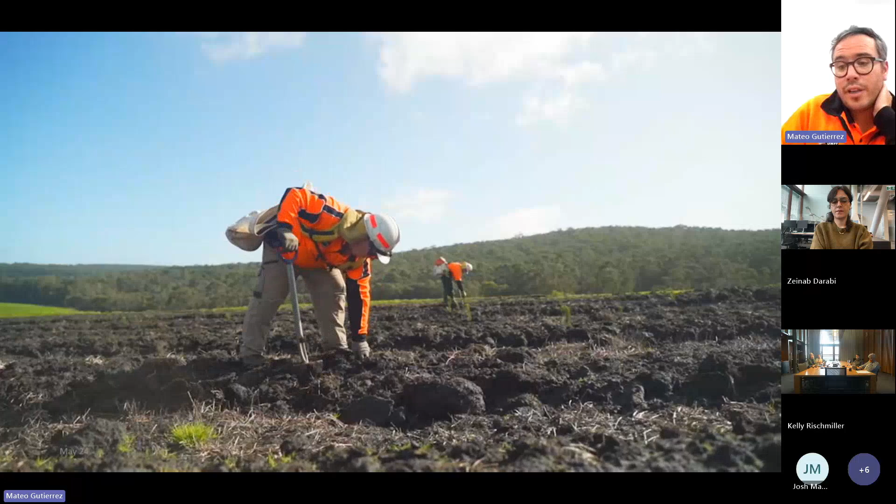So first of all, as you guys already said, I work for AKD Softwoods. It's an Australian-owned business. It's a vertically integrated business, so we own softwood plantations across Australia in different locations. We have different sawmills located across the East Coast. In those sawmills, we produce different timber products, from wood chips, which we export, up to structural timber products, but we also produce green case and other materials that can be used in packaging. But obviously, our main concern is structural materials.

Obviously, I'm a structural engineer. My role in the business is working with our clients, our customers and end users of our products to see how we can better utilize the fiber. We know Australia is a resource constrained country. We know that we have had timber shortages before, so we just want to make sure that we are using that timber correctly.

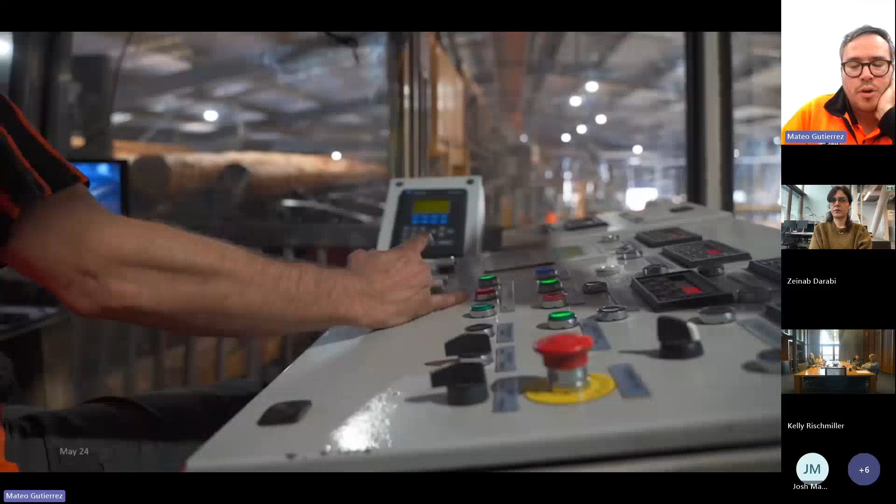So part of my presentation today will be explaining the way that we process our timber and how we use it, what are the implications of the material properties and the material characteristics in the overall performance of those products, and then suggesting some of the future pathways that we need to take in order to improve the use of the material and improve the performance of the material.

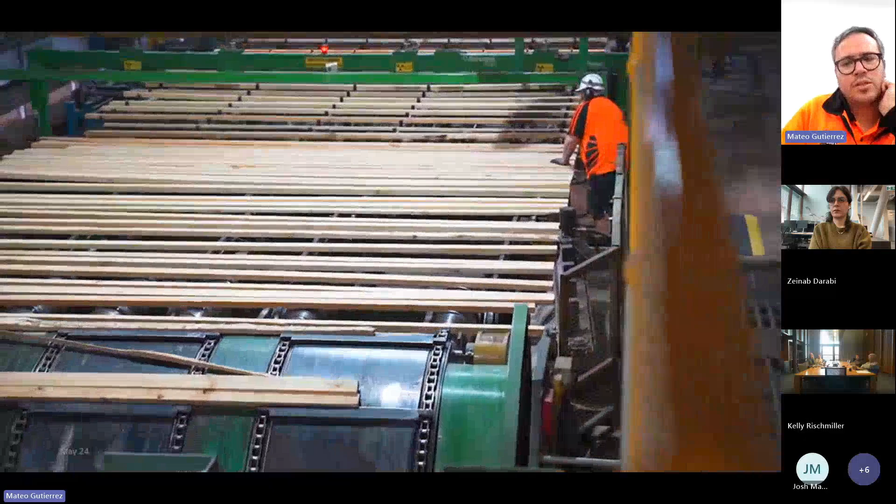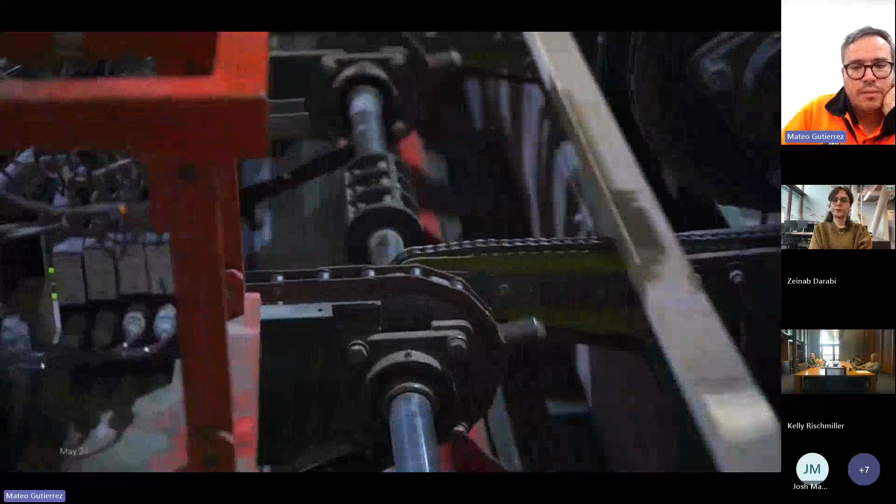So as you can see in these videos, AKD receives the logs at the different sawmills. The sawmill where I am today is in Colac, Victoria, around 2 hours away from Melbourne. But AKD also has other sawmills in Caboolture, Queensland, located about an hour and a half away from Brisbane, where we also produce structural timber, and Tumut in New South Wales, around 4 hours away from Sydney, and we also produce timber there.

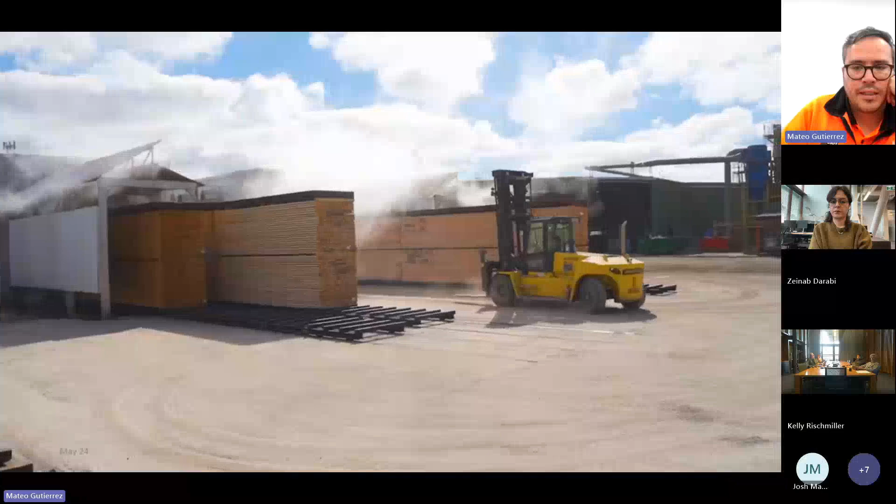But we have other locations like Yarram and Port Pirie, and also Oberon in New South Wales. So after timber is cut and graded at the green mill, timber is kiln dried and then goes to the dry mill where it's graded and then finally packaged and sent to our customers. But I will go through that later. Which is what you are currently seeing in that video.

So again, the content of my presentation will be some timber fundamentals, understanding the characteristics of timber and what will be the impacts of those characteristics in the end products. What are the main structural systems where we use timber, especially light timber framing, which is where all our products are being used. But I'll also give you a brief intro on engineered wood products, systems with engineered wood products,

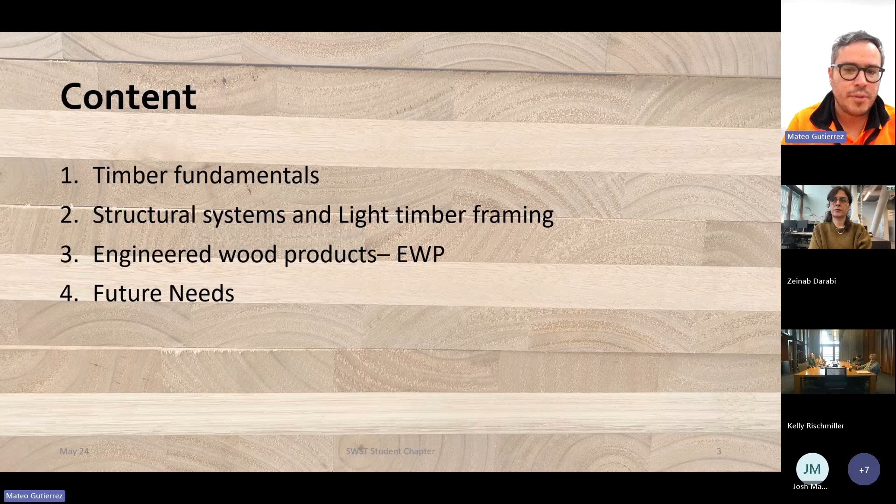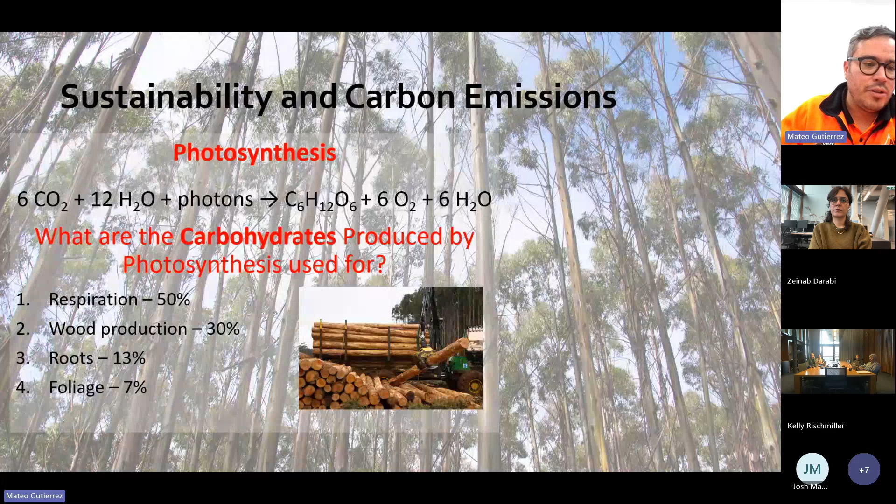and some future needs. So in terms of timber fundamentals, I gave the presentation the title of the ideal material to achieve net zero targets. It's because we know that timber sequesters carbon. A lot of that carbon is used in the production of wood, of course, and we know that around 50% of the dry weight of wood is equivalent to the carbon removed from the atmosphere. And to produce structural sawn timber, we use relatively very low energy,

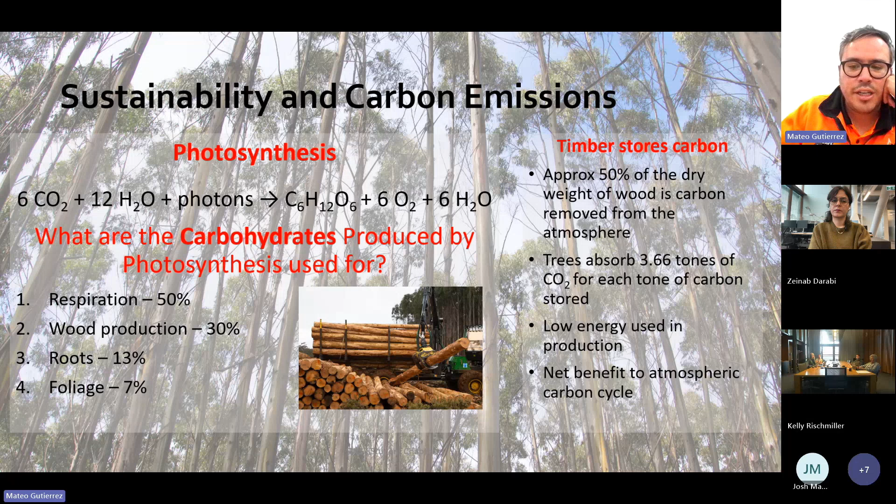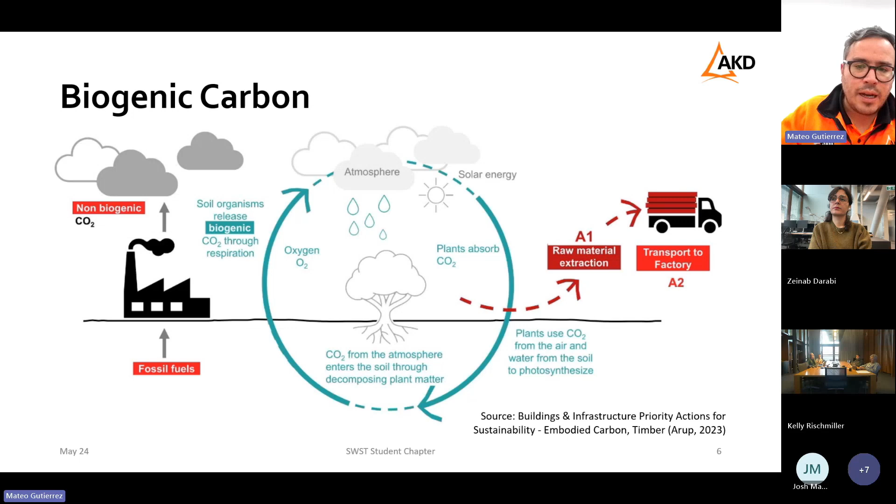and it is also important to understand what biogenic carbon is, because this is very common terminology that we use these days. And again, I'm not an expert on this. I'm a structural engineer, but I'm aware that this will have a massive impact in the future, especially with those zero carbon targets. Biogenic carbon is all the carbon that is produced and stored by the trees. So this is what makes timber carbon negative.

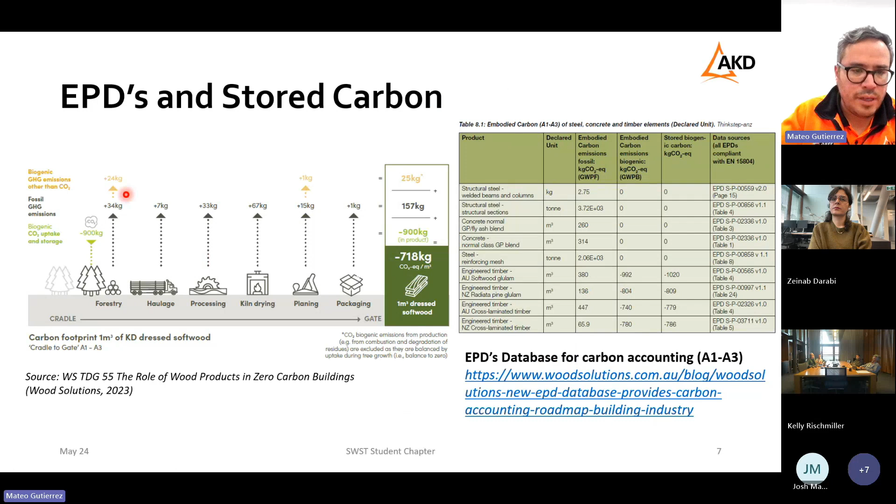So let me just turn on my pointer. So you have carbon emissions produced during the manufacturing or production of structural timber, but because timber sequesters carbon during the growth of the trees, the end number is a negative number.

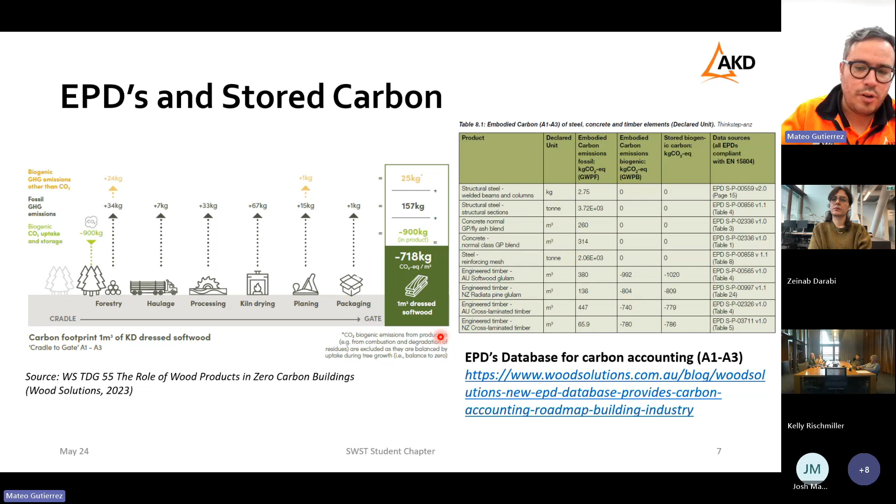So Wood Solutions actually just published a very complete data set or database with different timber products and the carbon emissions and EPDs from all those different products. So I would recommend you, if you're interested in this topic, to take a look at the Wood Solutions website.

So for those that are not familiar with the sawmilling process, or the process to produce structural sawn timber, as I was explaining before, we get the logs at the sawmill, we sort those logs into different groups based on the diameter and the properties of the logs, and then we run the logs through the green mill, where we cut them into green boards, and then those boards are stacked and sent to the kilns where they are dried,

and then after the material has been dried to a moisture content of around 12%, the material is run through the dry mill, where we trim those boards, grade those boards, and obviously dress them as well to the final dimensions. So this is a very important process, the grading process, and I'm going to expand a little bit more on that.

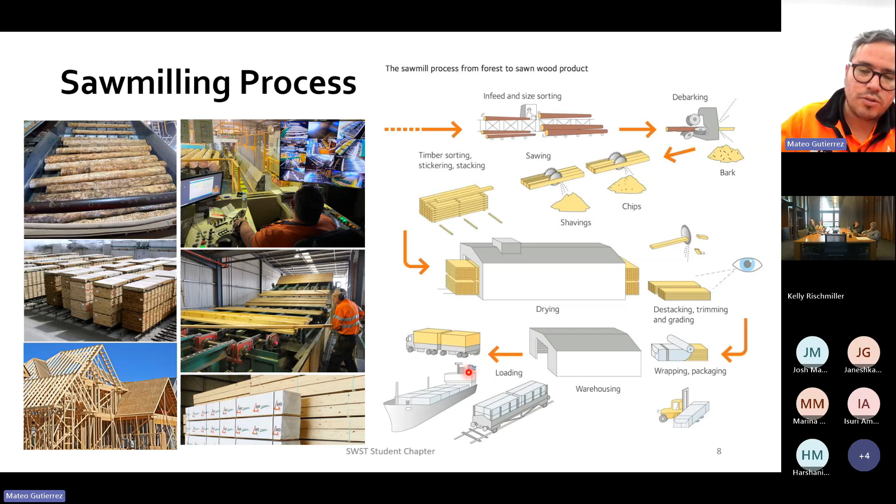And then finally, the material is packed, wrapped, and sent to the end users, which could be stick builders or frame and truss manufacturers, or even other factories that can produce engineered wood products based on those boards. So it is important that we understand some of the basic concepts about the anatomy of a log, because when we cut timber, those properties are going to affect the performance of the material.

So we know that obviously there is softwood and hardwood, and that we have fibers that are oriented longitudinally along the log height. And when we cut that material, which has a circular shape, we're going to end up with some rectangles, and those rectangles are going to be affected by the growth rings of the log.

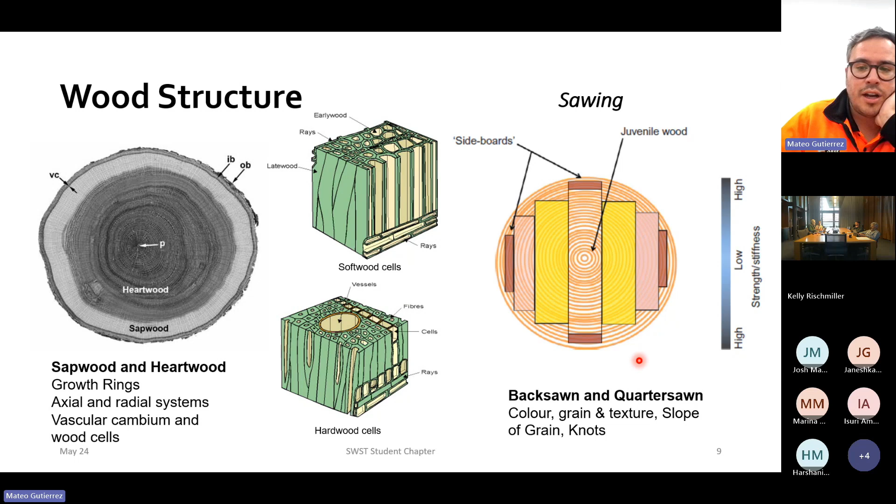We know that the center of the log, usually where the juvenile wood or the pith is located, has low stiffness, and the outer part of the log, where the sapwood is, has higher stiffness, higher density, and therefore better mechanical properties. So this has an impact not only on the stiffness and the mechanical properties, but also on the preservation of the material and the effectiveness of those preservative treatments as well.

Kiln drying is another very important process, because timber is highly dependent on the moisture content. We know that timber suffers dimensional changes below the fiber saturation point. So we want to make sure that the timber moisture content is below the fiber saturation point, because we want to reduce those dimensional changes, but also because the mechanical properties change with moisture. So the lower the moisture, the higher the strength and the stiffness in the material.

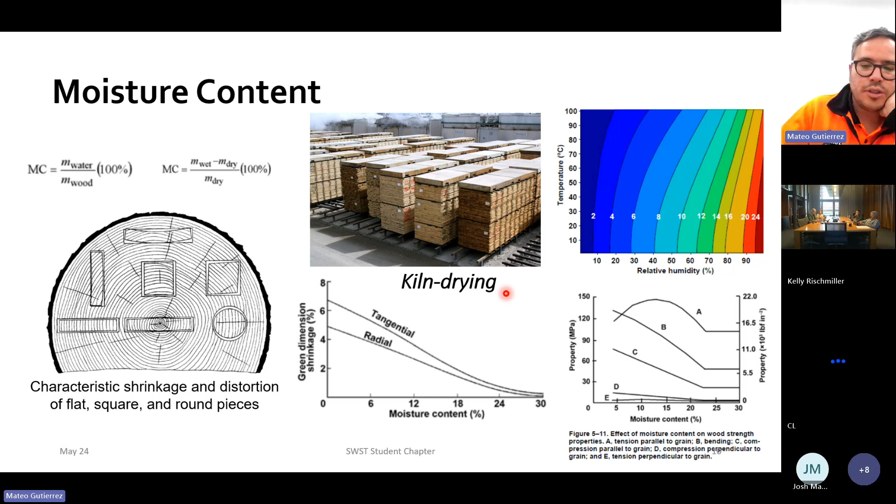And obviously that moisture content will depend on the environmental conditions where the timber is being stored and being used. So we use tables like this one to calculate the equilibrium moisture content of the wood, and what will be the impacts of that moisture content in the properties.

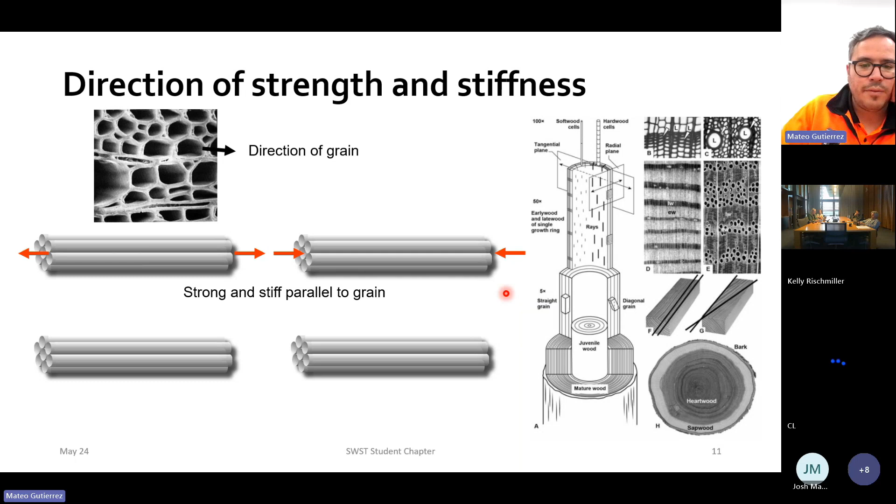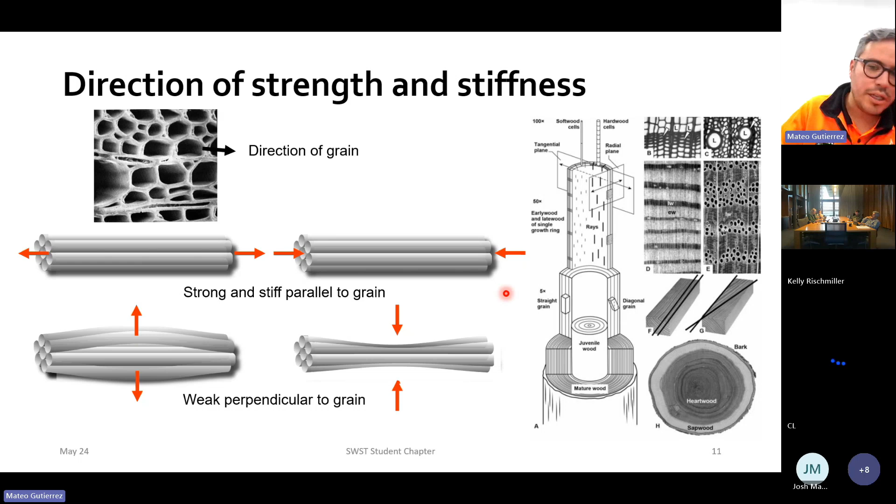Another thing that is very important is the direction of the fibers. As I mentioned before, the fibers are mainly responsible for the strength of the material. We know timber is very strong when we apply loads parallel to the fibers, and it's quite weak when we apply loads perpendicular to the fibers. So understanding the orientation of those fibers and the impact different features like knots or holes will have on those mechanical properties is quite important for us.

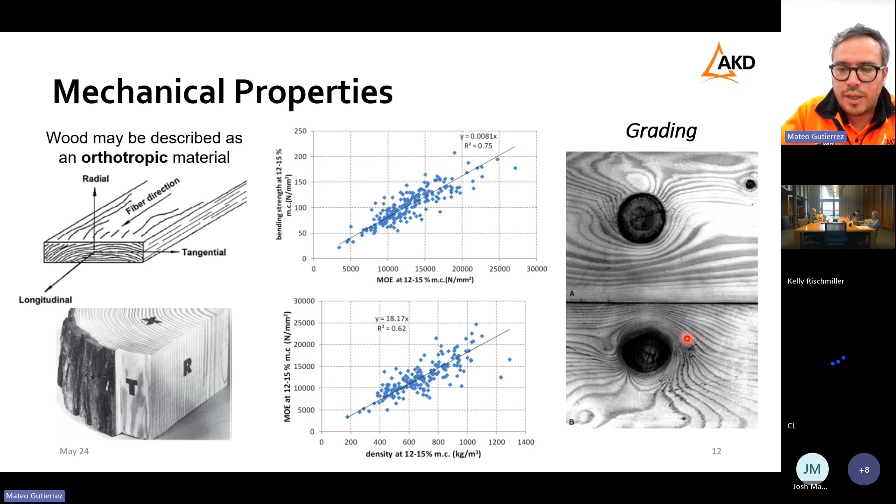And that's why we have the grading process, because through the grading process, we use some primary properties like the stiffness or the density to predict the strength of the timber. So knots that may affect the orientation of the fibers, or that may reduce the cross section of the timber pieces, will have an impact on the strength of the material.

And that's why we have strength grading or stress grades, which is pretty much having different groups of timber that have similar characteristics. There are different ways of doing stress grading. The most common ones are visual grading and machine grading. At AKD, we only do machine grading. So we use cutting edge technology to determine the properties of the boards and to predict the stiffness and the strength of those boards.

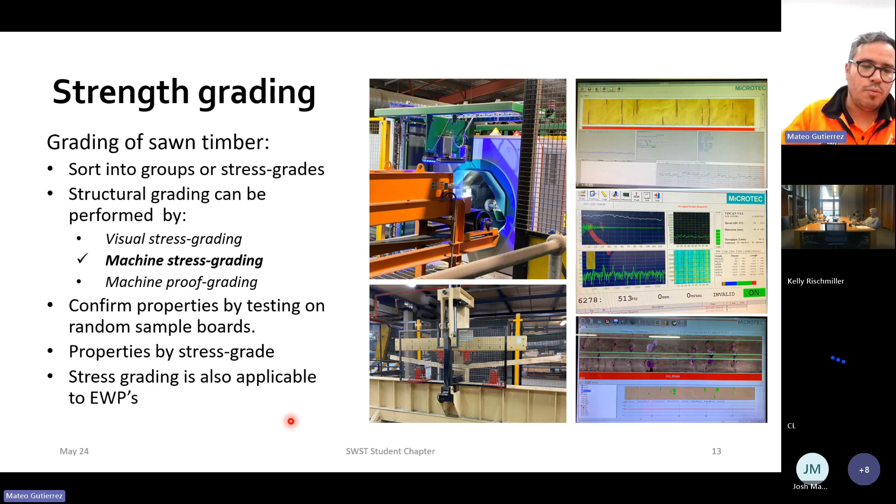When we grade timber for strength, we use what is called the characteristic value. So if you have a population that will have a range of properties, we use the 5th percentile to describe what will be the characteristic strength of that material. So we can guarantee that 95% of that population will have properties above the value that we have declared or considered.

Whereas for the stiffness, or MOE, modulus of elasticity, we use the average value. So we know that around half of the boards are going to have a modulus of elasticity above what we have considered the declared value, and the other half is going to be below. So in this curve here, you can see that this is the whole population. And then once we establish those grades and those thresholds, we segregate the different groups that we have.

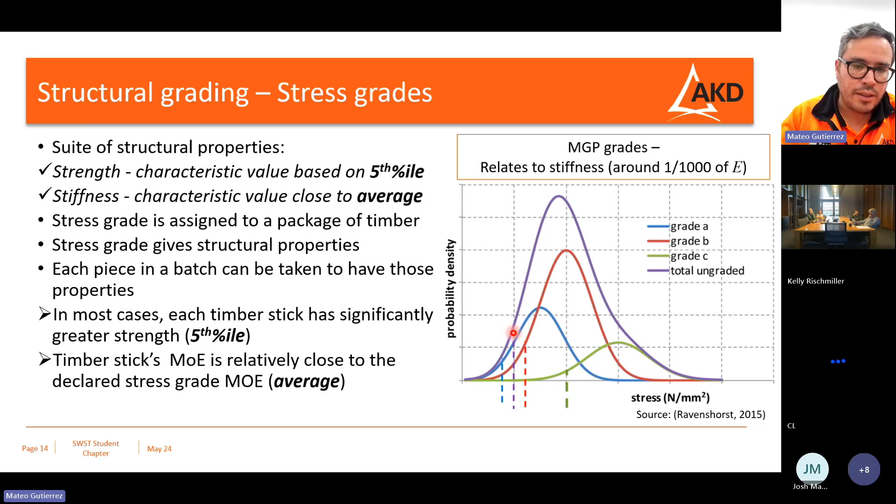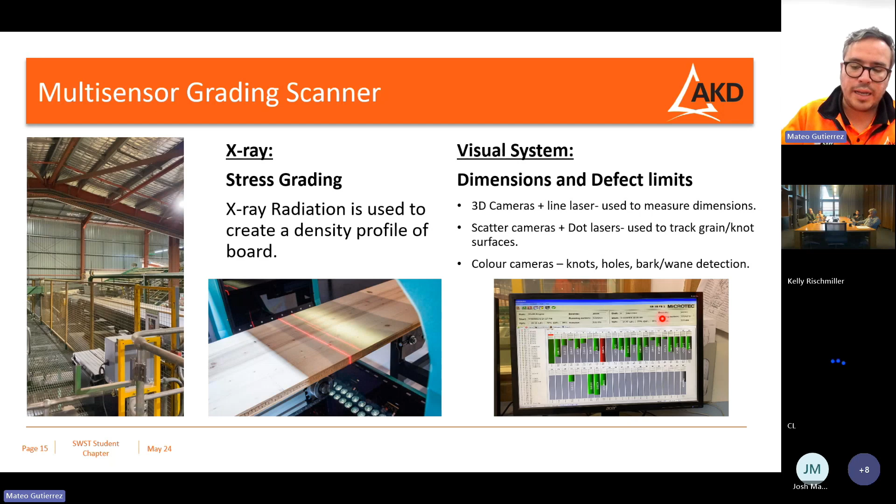As I've already mentioned, we have cutting edge technology to do this grading process. As you can see here on the left-hand side, we have the scanner, which uses a combination of different sensors, like, for example, X-ray or a triangulation of cameras. We also use lasers to determine the dimensional properties, and then based on those properties, we can segregate the different groups.

We also use vibration or acoustic grading equipment, which is a very accurate method to measure modulus of elasticity. This is pretty much a hammer that is hitting those boards while they go through the sawmill. The hammer creates a vibration in the board, and then we measure that vibration and we create a profile of the modulus of elasticity based on that vibration.

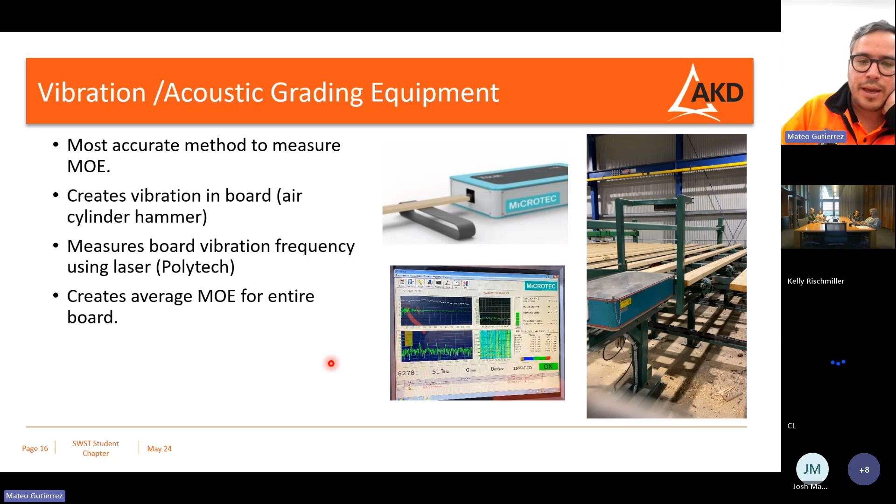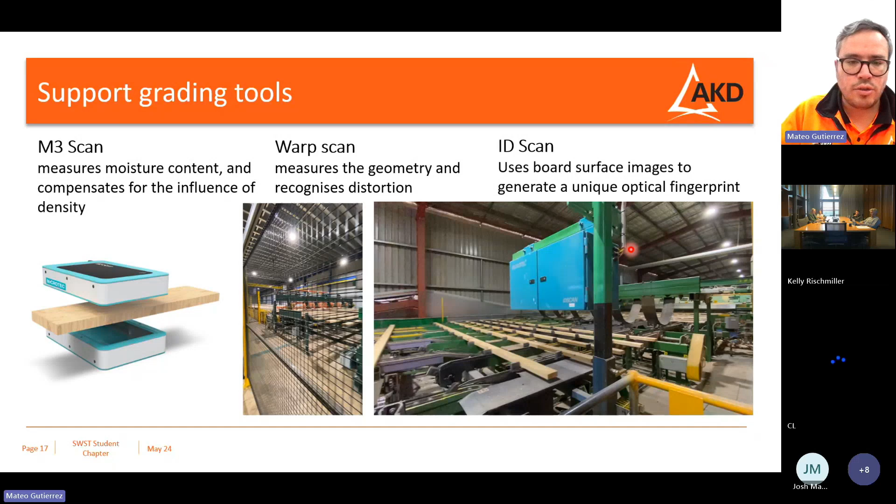And then we use other supporting equipment. We use scanners to measure the moisture content. We use other scanners to measure the distortion on the boards, by taking photos and using lasers to see those dimensions. We can establish which boards are out of the tolerance of our different thresholds for bow, spring, and other distortion like twist as well.

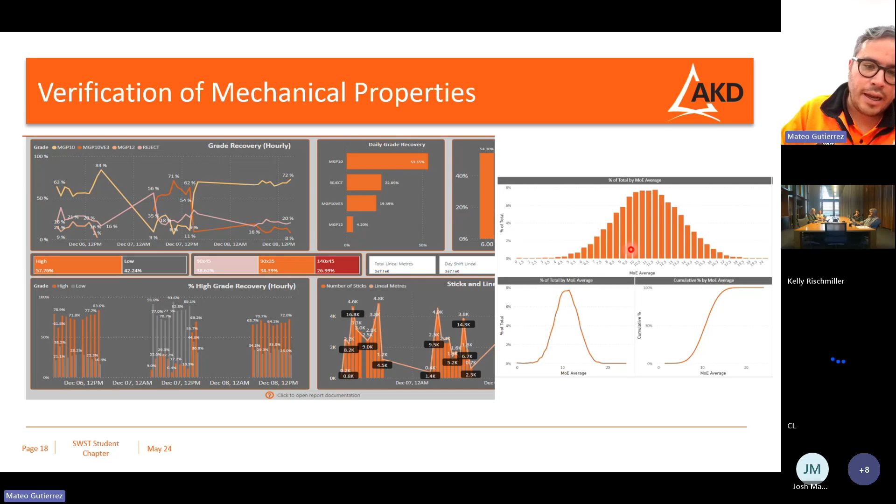So we are capturing data all the time, and then we use this data to monitor the gradings that we are producing, understand the characteristics of the resource that we are producing, and see how we adjust those thresholds to make sure that we are always compliant with international standards, and making sure that our material is meeting the needs of our clients.

Another process that is very important as well at the sawmills is the treatment.

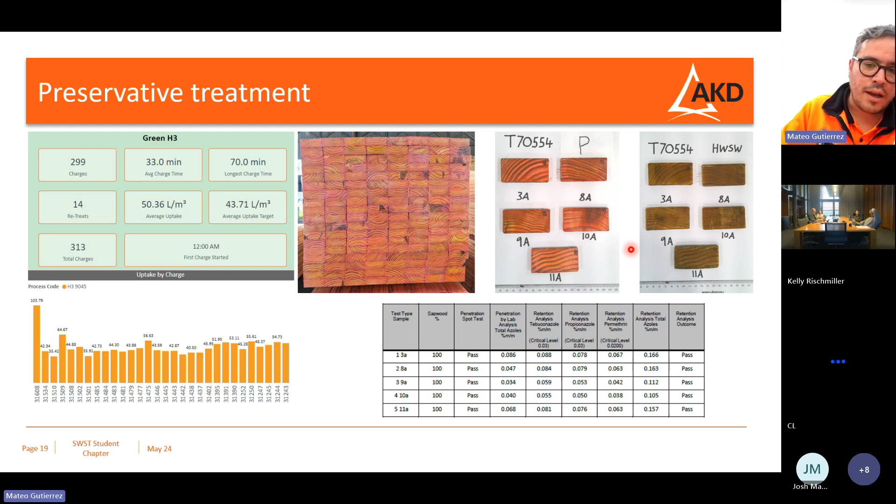We offer different treated products to different hazard classes, H2, H2F, H3. So we are also doing permanent monitoring on the effectiveness of that treatment, and making sure that we comply with Australian standards and other regulations.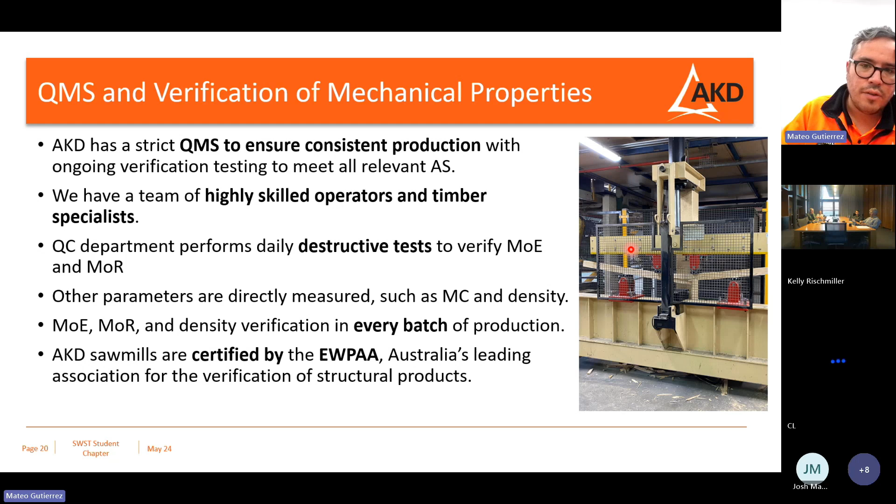And again, to be able to do all of these, we have a very strict quality management system where we verify the properties of our boards. So we need to take samples in every run and in every batch, and we need to actually test those boards and make sure that all the density, strength, MOR (modulus of rupture or bending strength), and stiffness, modulus of elasticity, that we predict with our scanners and other equipment is actually matching the results from those tests.

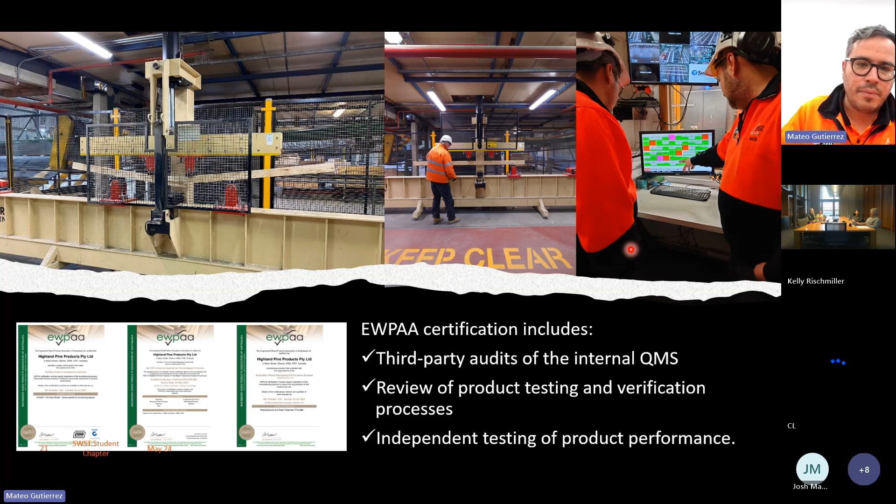And we are obviously third-party certified, and those certifiers will go to our sawmills and review all our processes, review our documentation, review all the testing, take random samples every now and then. They do their own testing and then make sure and ensure that our products are actually complying with Australian standards.

So that's a little bit of a summary of how we produce structural graded timber and what will be the different roles that an engineer and the quality guys will have in a sawmill to be able to control the production of structural graded timber. In order to use these materials, we have different structural typologies, and I'm going to focus especially on light timber framing.

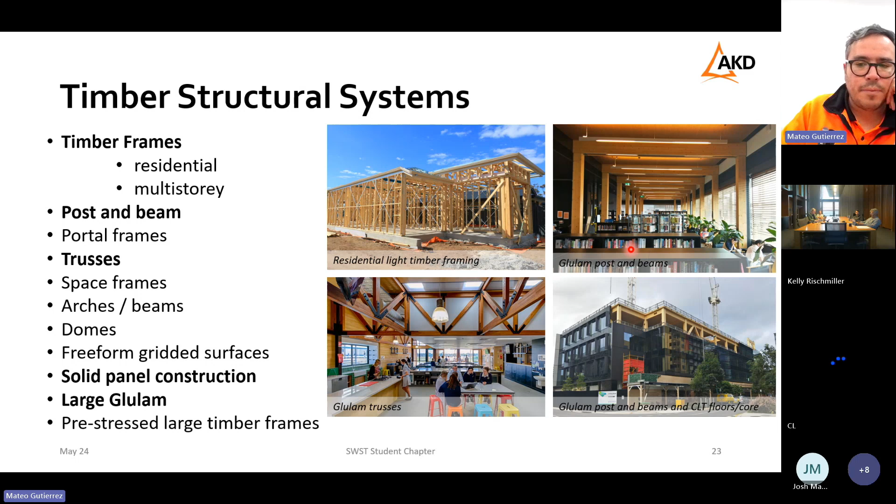So obviously timber can be used in different systems. We can have the traditional light timber framing systems that we use in residential housing, but we can also use light timber framing for multi-residential construction or mid-rise buildings. We can have posts and beams, which is very common in glulam. We can have trusses. We can have solid panel constructions when we use CLT, for example. So there are many different typologies. But again, I'm going to focus on light timber framing. This is what we produce, and this is where 80% of the timber that we produce in the country goes to.

Again, you've seen this before. This is mostly the system that is being used in residential construction for one-story and two-story houses. There are different ways of building these houses. You can build it on site, like stick builders do, or you can prefabricate all these frames and trusses and then send it to site already done. If you start adding other parts like cladding or windows or insulation, then you increase the level of prefabrication and speed up the construction process. And obviously, light timber framing can also be used in multi-res buildings with DTS solutions that comply with the national building codes.

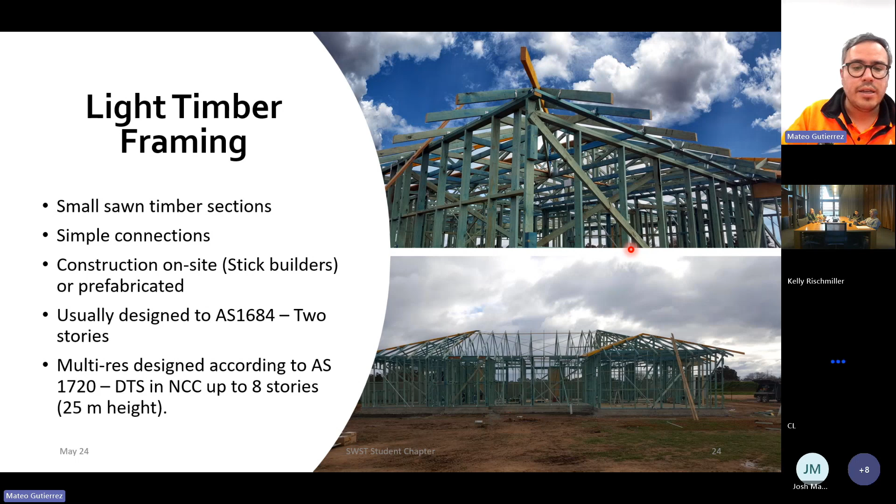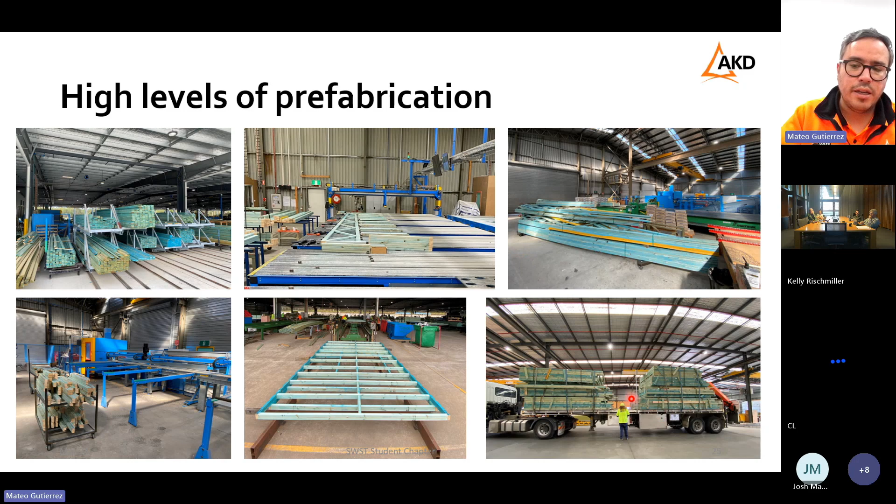These days, you can see that there are very high levels of prefabrication in some of our customers' plants, where we send all the timber and they have all their designs, and then they use CNC machines that are pretty much robots that pick up the timbers. They have automated pickers that select the different timber boards, and then they start producing the different elements, either walls or trusses, based on those designs. And finally, you end up sending those jobs pretty much ready to install and really speed up the construction process.

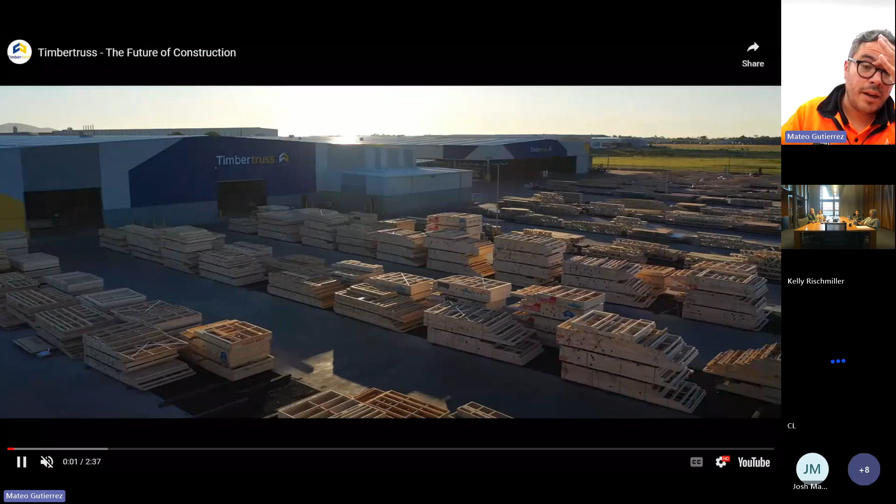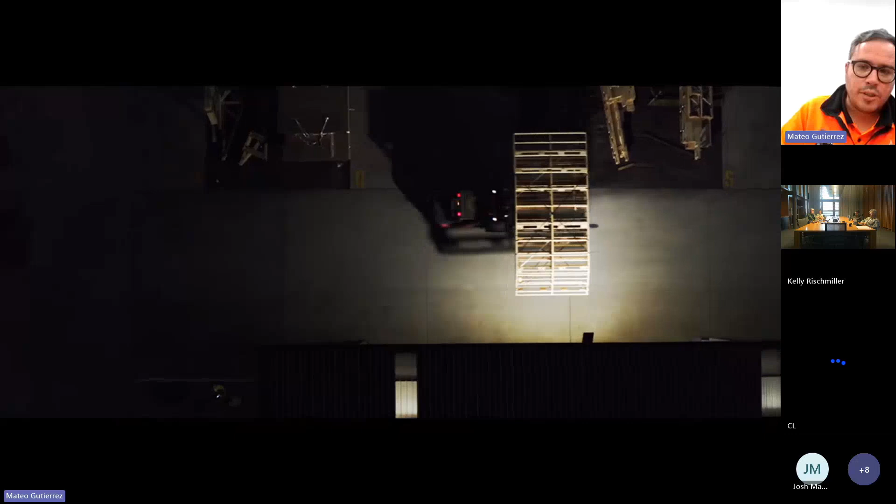So this is a video from one of our customer partners located near the Colac sawmill, where they have a very automated process for manufacturing these frames and trusses. So it's actually quite interesting to see how this prefabrication has advanced in the last few years, which makes this typology and this system very competitive when you do mid-rise buildings.

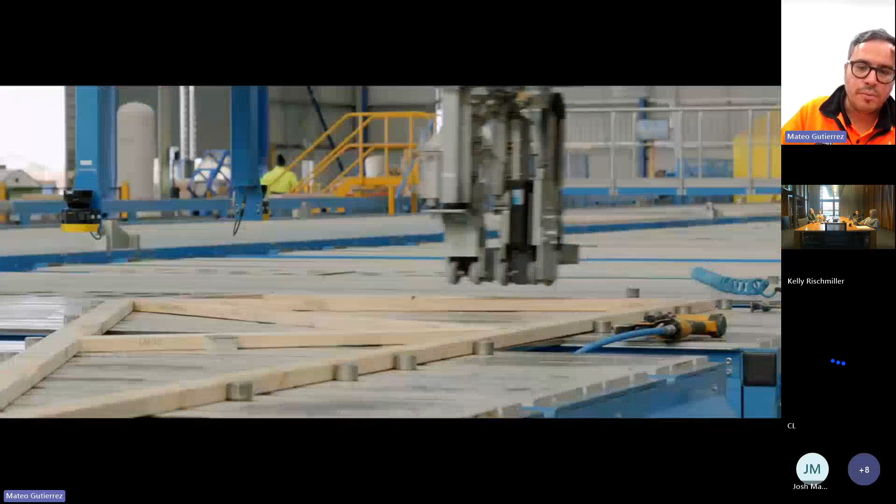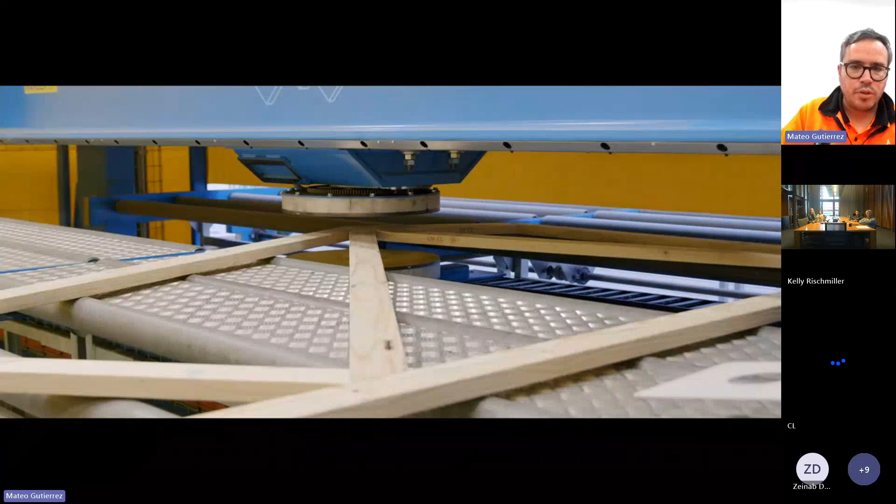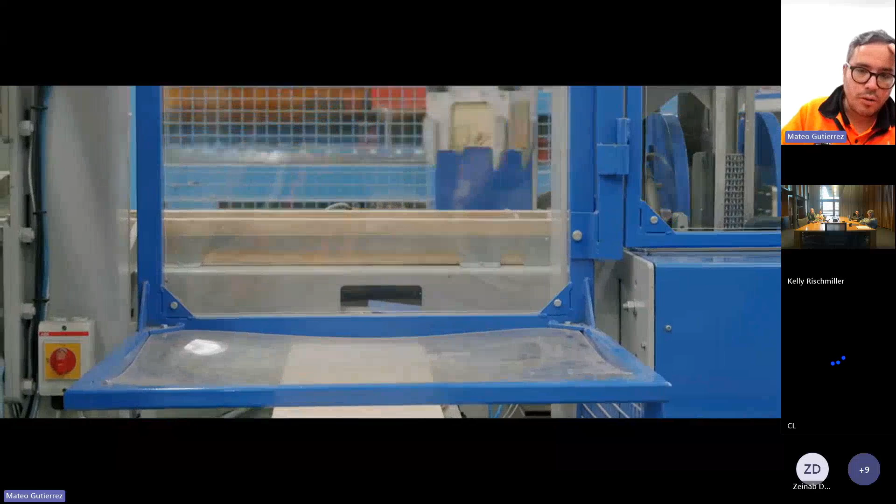So you can see there that all the parts have been already cut to the final dimensions, and then you have robots that will locate nail plates in this case, but you can do it also with nail guns and other sorts of connections, and they locate it in the final position, and then you press it to the right conditions, and then you pretty much can build a wall or a truss in a few minutes without any sort of human intervention. So that's really cool.

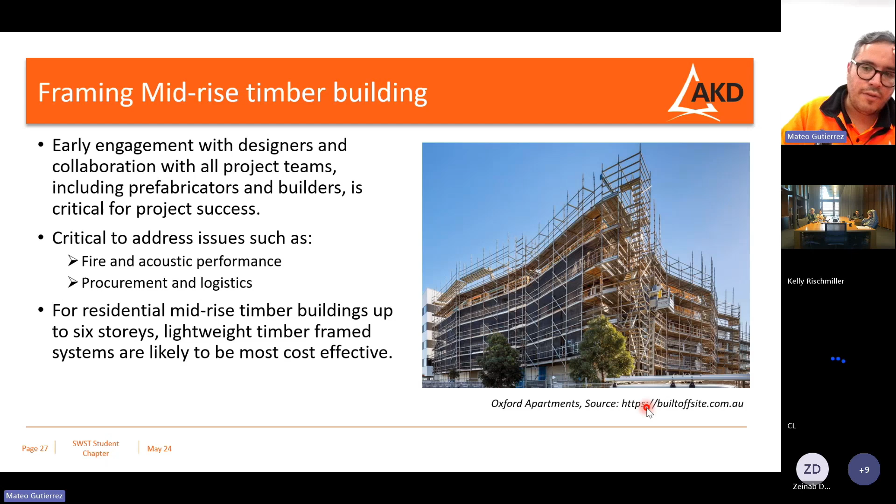Obviously, you can use light timber framing for mid-rise buildings. And again, it's important to engage with the designers as soon as possible, but also engage with the manufacturers to make sure that everything is accounted for and that you address critical issues like fire and acoustic performance, and obviously the procurement of the material and the logistics for the dispatch of the different parts, so you can speed up the construction. But obviously, there are other types of materials made out of timber.

Engineered wood products are very common these days. There are many types of engineered wood products depending on the way that you process the logs. As I was explaining before, you can cut the logs and have boards, and then with those boards, you can glue them together and create glulam. Glulam is just a glue laminated element made of different boards that are all oriented in the same direction, whereas cross-laminated timber, as you already know, is consecutive layers of timber that are perpendicular to each other.

CLT is very useful for floors and walls, when you want to cover surface areas, whereas glulam are prismatic elements that are very convenient for beams or posts where you just want to transfer the load in one direction. But if you peel the log and have very thin layers of timber or veneers, then you can produce materials like plywood, which is layers of veneers glued perpendicular to each other, whereas in LVL you have all the layers and all the grain or fibers oriented in the same direction. That's why LVL is very common in beams and studs as well.

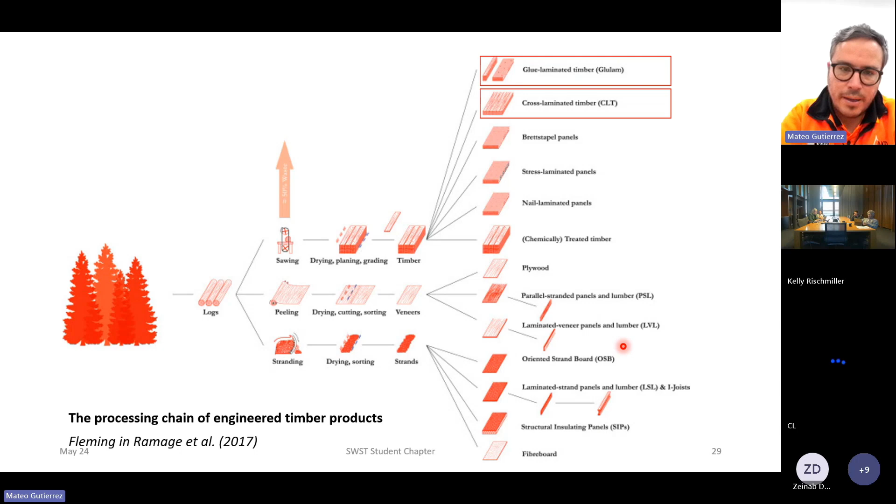For those that are not familiar with the production of glulam or CLT, this is all very similar to sawn timber up to the grading part, but after you have the graded material, you need to finger joint those boards, because usually glulam beams are longer than 6 meters, which is usually the length that you get out of the logs. So if you want to make longer elements, you need to finger joint those elements and then plane the surface, preparing it for the application of the glue. After the glue is applied, you press it, and create those bigger sections that are later cut by CNC machines. Finally you package it and send it to the construction site.

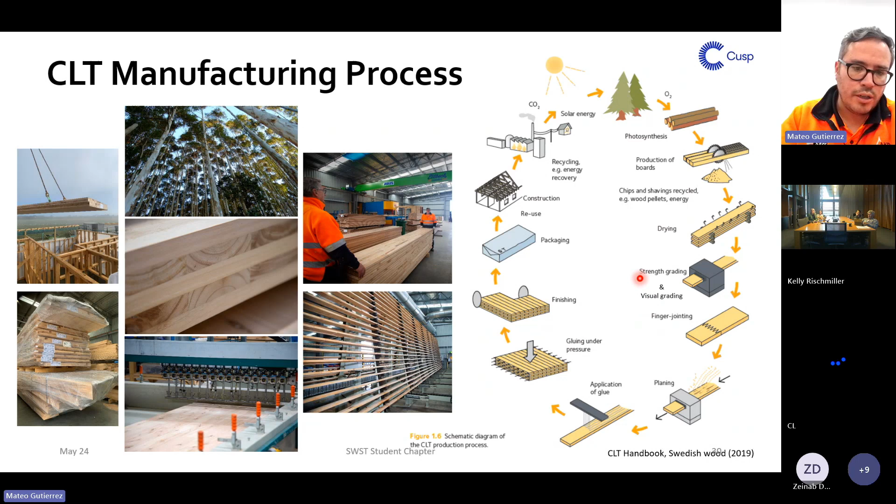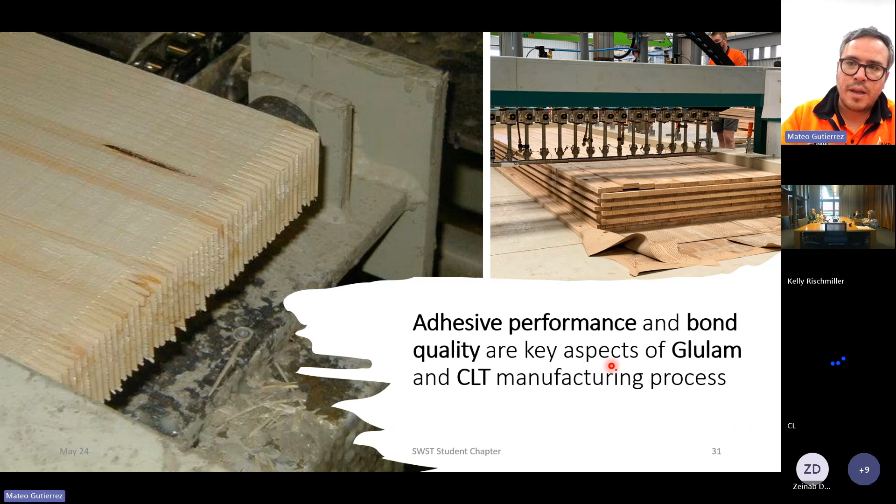Before working at AKD, I had the chance to work in an engineered wood company producing glulam and CLT. One of the things that is important to mention is that the application of the glue or adhesive is key for the correct performance of those materials. The right performance of the glue is critical, and we need to control many different variables. Some are related to the wood properties, like the density of the wood and the moisture content. Others are related to the processing, like the preparation of the surface for glue application, and the dimensions of the elements you are putting together. Obviously, the adhesive plays a massive role as well, and other application factors like glue rates, glue spread, curing times, assembly times, or pressure are very relevant.

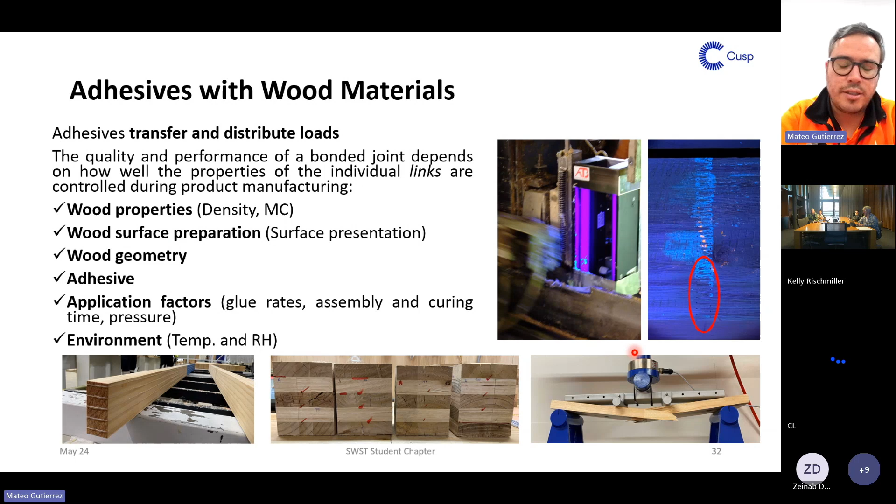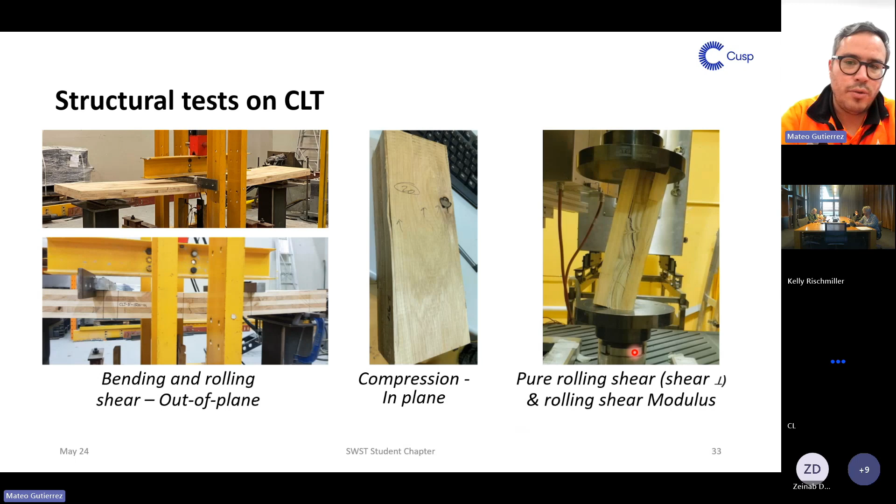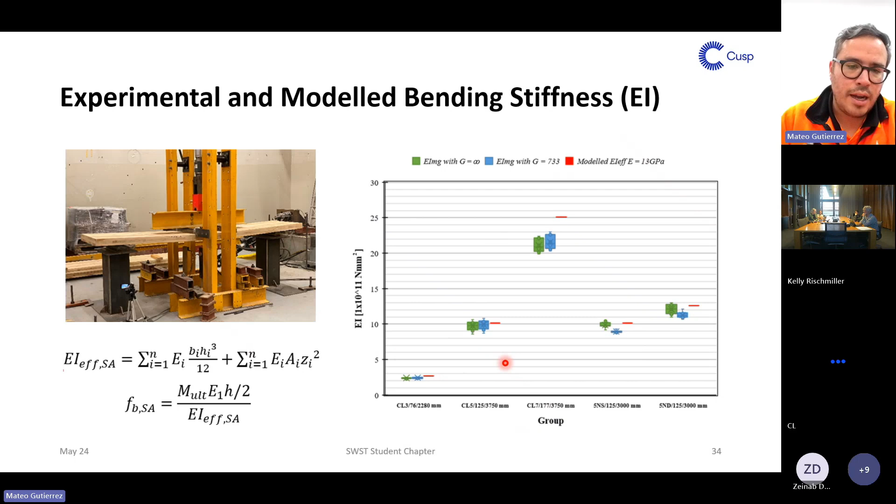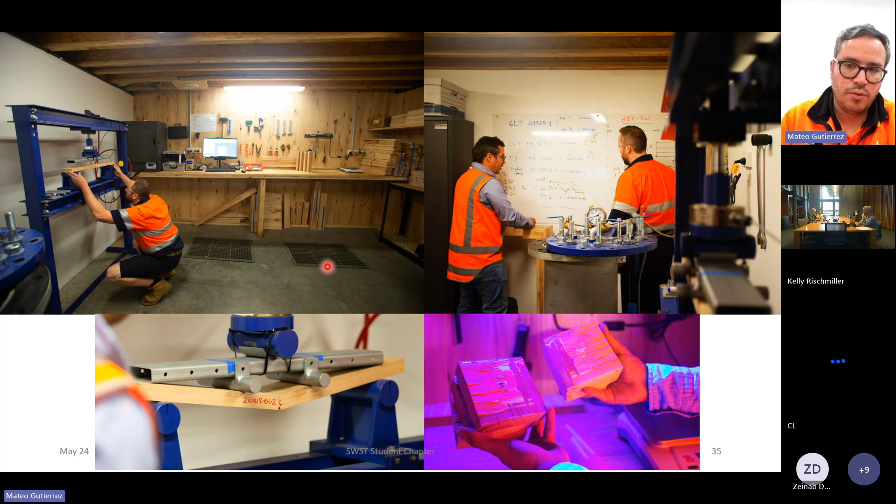This is really critical, and part of the role engineers have in those factories is controlling those production parameters and making sure that the glue lines perform well. But you also have to do a lot of testing, same as the testing of the feedstock at the sawmills, where you predict the properties and then verify that they are actually the ones you are declaring. You have to do the same with engineered wood products; glulam, CLT, LVL all need to be tested to verify that the declared properties are the properties you get. Then you create models, and confirm that whatever you predict matches what you get in your tests. And obviously you have QA systems where you control the quality of the glue lines, the finger joints, and the mechanical properties of the elements you are producing.

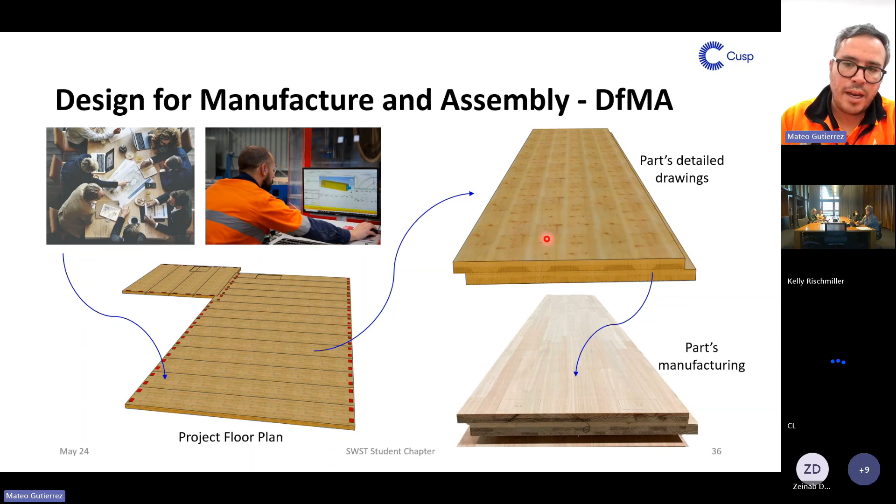Another very important role of engineers in this industry is design for manufacturing and assembly, also known as DFMA, where you design each individual part and ensure those elements are manufactured to a very strict tolerance, because when you send them to the construction site, you need to make sure they fit really well and that those tolerances and properties are the ones you designed with. This is a project that we did in my previous role. This is the design. This is a second floor that was installed on top of a concrete floor.

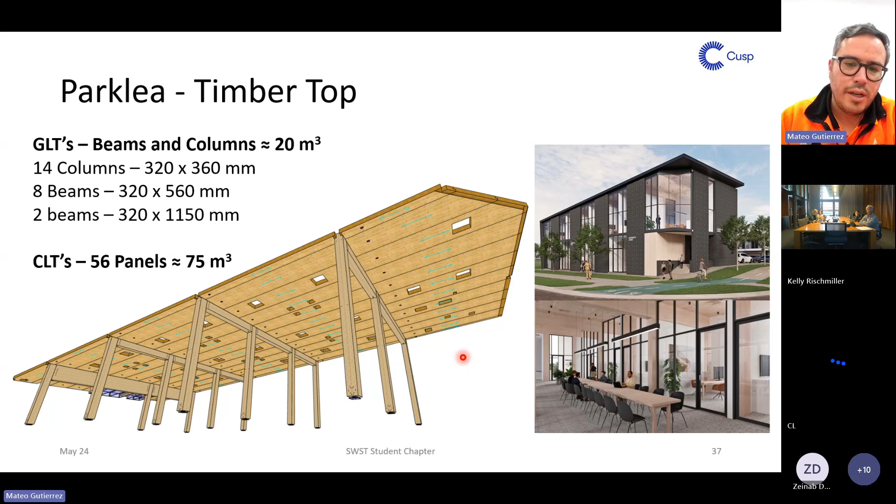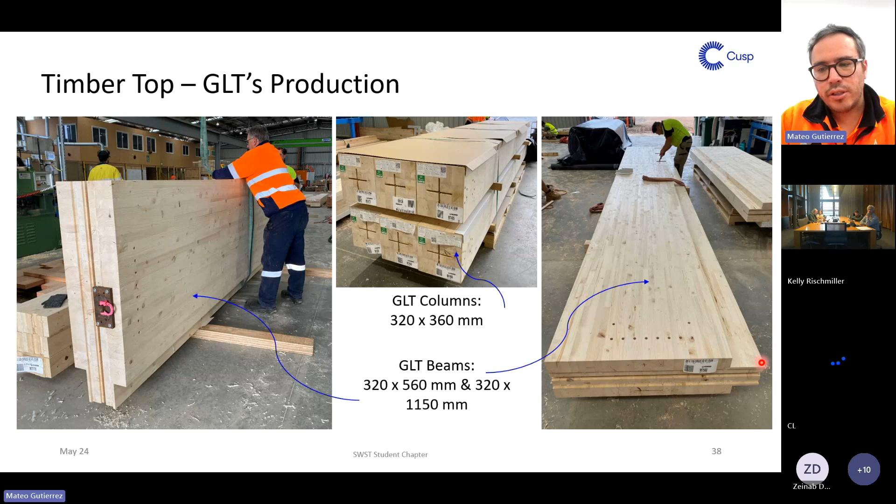You can see all the different panels, CLT panels and glulam. And these are some photos during that manufacturing process when we did all the QA processes, when we verified that all the dimensions were right, with the CNC machines and the robots creating all the holes and preparing the elements for the connections.

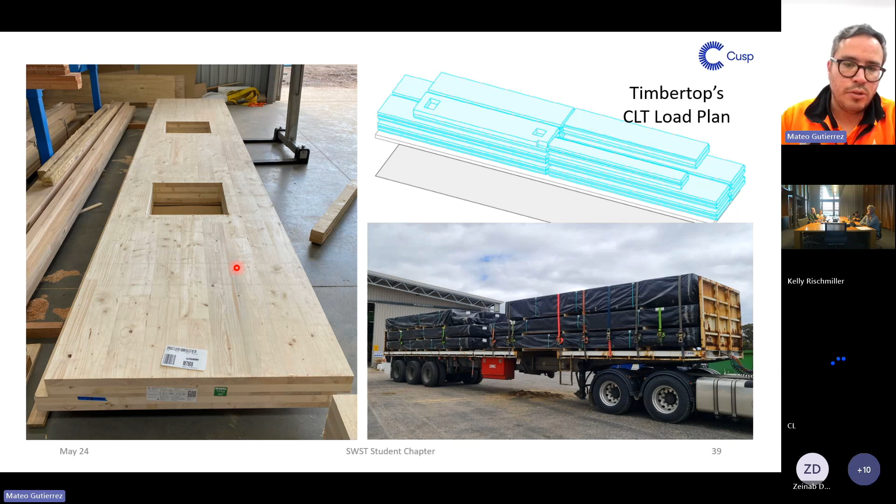And then we designed and planned how those panels were going to be loaded and in which order they were going to be loaded to be able to make the construction more efficient. So this is all part of what an engineer will do in planning that construction phase, and then obviously delivering those elements to the construction site, making sure that they're all installed accordingly.

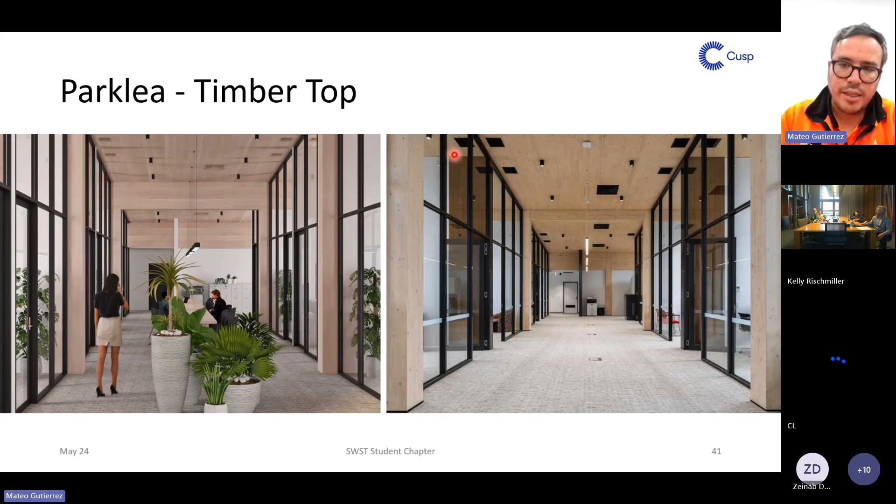And this is how the end product will look like. The photo on the left-hand side is the architectural render, and on the right-hand side is how the construction ended up looking.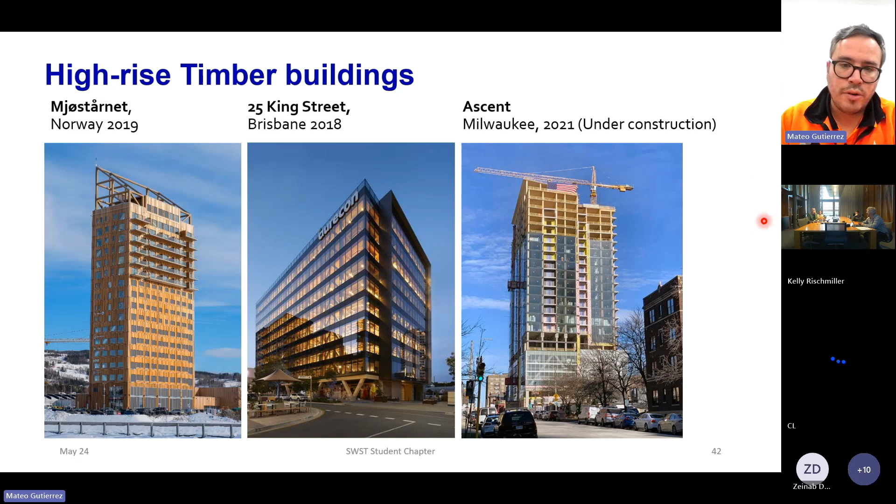And one thing that I also wanted to mention is that obviously by using engineered wood products, we can now build higher buildings. And we know that timber is now being used for high-rise buildings up to 20, 30 stories, but this brings additional challenges, particularly for fire safety. So part of what I did in that role was also going through a testing program and understanding the performance of the material.

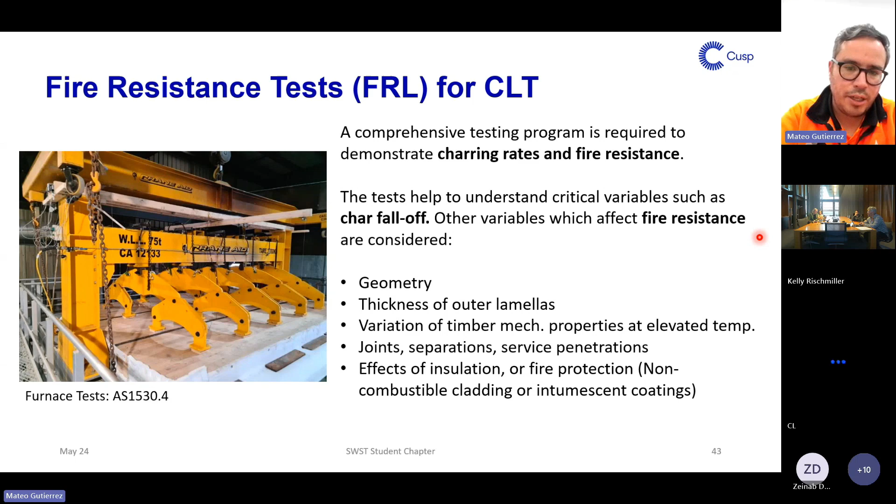And I know that you guys at UQ have a group that is dedicated to fire, which I had the pleasure to be part of. And we know that there are many things that affect the performance of those panels, and it's not necessarily related to the fire resistance, but there are many other things like fire growth and fire contribution.

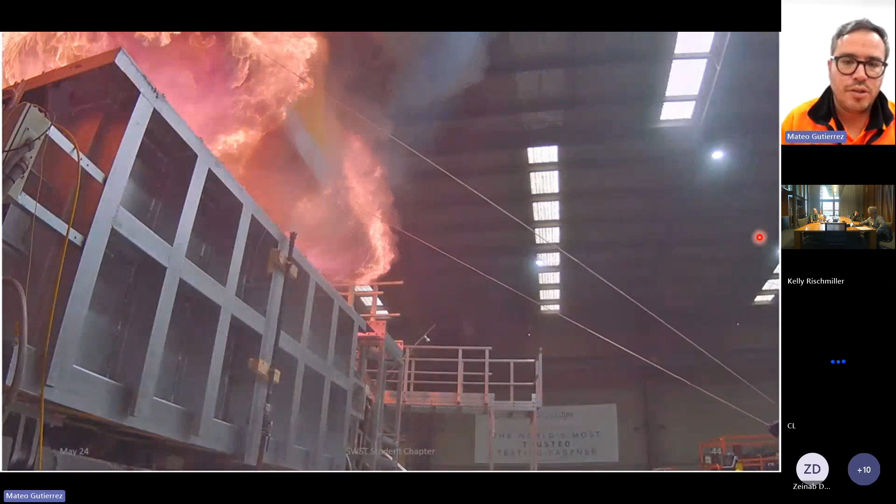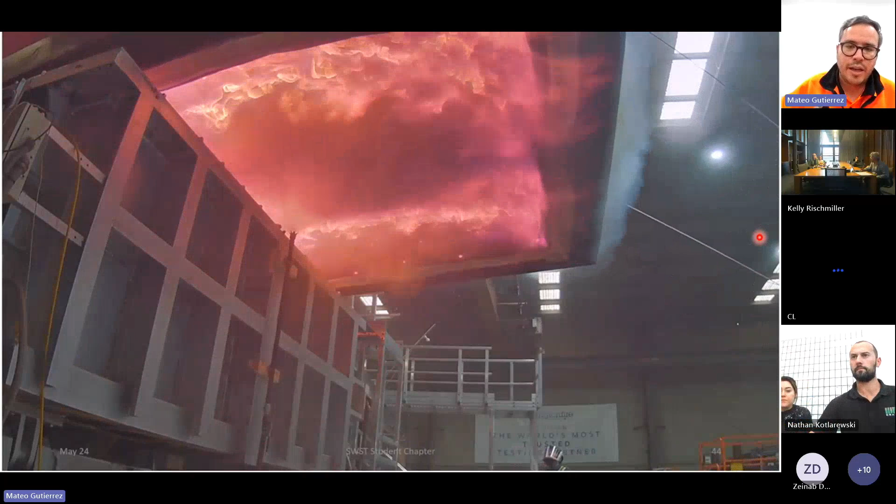So this is a photo of the test that we did when we were testing this material after 120 minutes of testing on a furnace test with a loaded floor. This is how the test looked when we finished it.

So I tried to cover as much as I could, but my last slides just give you a glimpse of what the future needs in this industry, I believe. So we need to better understand the properties of our resource and what will be the impact of that resource in the sawmilling. For example, we process a lot of softwood from Queensland, and that particular fiber has a lot of resin content, and we really want to understand what the properties of those logs are and how those properties will impact the recoveries at the sawmill and the characteristics of the products that we produce.

We feel that we need to expand the deemed-to-satisfy solutions that we currently have. We can only use DTS solutions for one and two story houses of a particular size and a particular height, and we need to expand that to be able to reach other markets where timber can be used, but it's not currently used because the certification process and the design process is too complicated. So we need to expand the scope of the current standards and make sure that we can use light timber framing in mid-rise buildings.

Obviously, our design standards have issues, and the more that we research the properties of the timber, the better we can address those issues. And then we need to better use the fiber that we have. We are constrained by the fiber that we have available in the country, and that's where we need to have imported timber. So we really need to make the most out of the fiber that we have in Australia and better utilize those resources.

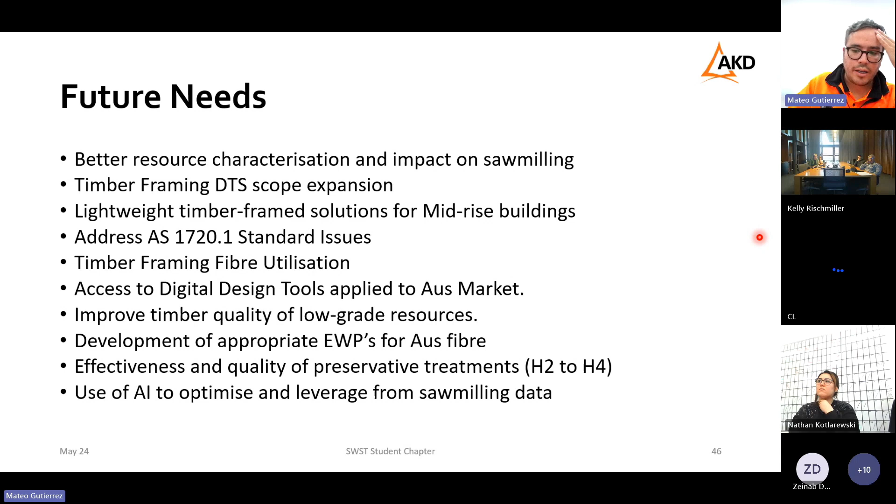We need more digital tools. We need to improve the quality of the timber and the quality of our treatments. We need to develop appropriate engineered wood products for our fiber, and then use modern tools like AI to optimize and leverage the data that we capture in the forest, in the sawmills, on the construction site, and in the marketplace. So I hope this has given you a good understanding of what engineers do in a sawmill.